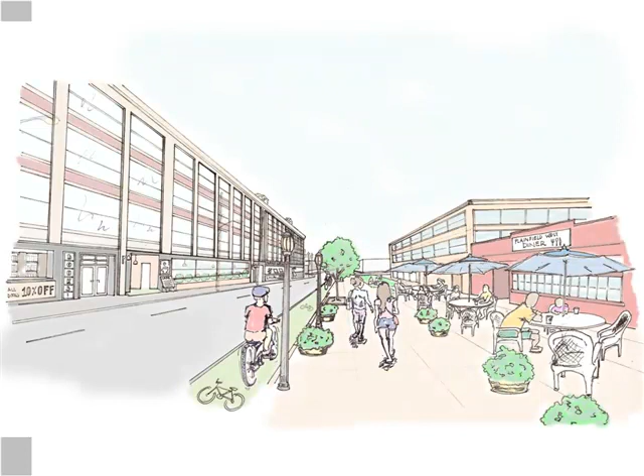The community charrette on March 27th provided us with an immense amount of feedback and information on Plainfield West that we have been able to use to further our visioning study. Our charrette focused on two key intersections that had been previously identified as potential future TODs, Grant Avenue and Clinton Avenue. During the charrette, citizens from the various neighborhoods in Western Plainfield gave us key insight, opinions, and commentary.

The existing land use map demonstrates the features of Plainfield West we took into consideration in our visioning process. The parks, especially Greenbrook, play an important role in this community.

Presently, Phase 1 drawings of the Greenbrook Trail have been completed and will soon be out to bid for construction. These paths connect to both Clinton and Grant Avenues. After identifying the other parks throughout the southern side of the tracks, we enhanced the bike loop in Plainfield West to include these additional green spaces.

Along with increasing bike paths and ridership in Plainfield West, there are many opportunities at the edges of Greenbrook Park to enhance usage of the park and engage the Plainfield West community.

In addition to the parks, other existing land use elements include established residences, community programs, industrial lots, vacant lots, and the two historical train station sites.

Our proposals take consideration of the susceptibility to change map, first highlighting sites most immediately susceptible to change in yellow. These sites include vacant lots and buildings that could be developed in the near future and are included in Phase 1 of our proposal. Sites with medium susceptibility to change are highlighted in lighter yellow and include sites currently in use but which we believe could ultimately better service Plainfield with different uses in the future. They are discussed in Phase 2 of our proposal and are considered more long-term changes.

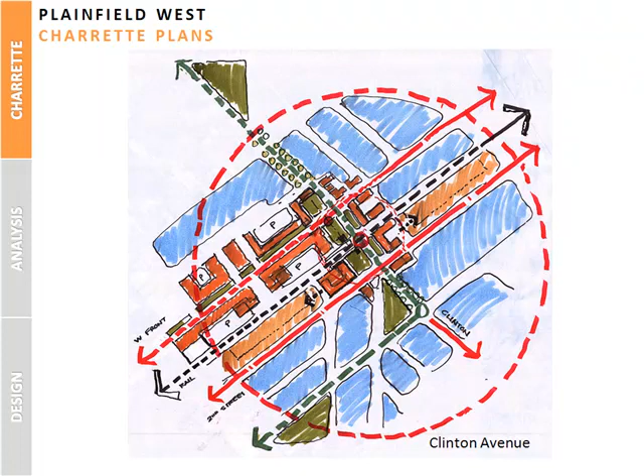Our drawings and discussions with the community at the charrette established Clinton Avenue as a primary TOD hub with the possibility of a future Plainfield West train station.

Current distances on the Raritan Valley line are among the primary considerations for Clinton Avenue as a TOD. In addition, Dunellen has a very limited parking capacity, which Clinton Avenue could capitalize on.

In conjunction with the TOD at Clinton Avenue, the charrette developed Grant Avenue as a community-based amenities and services hub, including retail and recreation. In our proposal, we continue to develop what was initiated at the charrette.

Recognizing the potential for a train station and yet the longer time frame this would take, in Phase 1 we have developed Clinton Avenue as an intermodal transit station, connecting to and accommodating pedestrian, bike, jitney, and existing bus routes. This intermodal hub would serve as a placeholder for train service in Plainfield West and begin to develop the density and services required to create a future station.

Recommended Phase 1 land uses surrounding Clinton Avenue include the intermodal station, surrounding mixed-use neighborhood commercial, and new residential. Land uses around the Grant Avenue community hub include recreation, city regional commercial, and new residential.

In addition, we identified infill lots on 2nd Street between Clinton and Grant Avenue, development of which would improve the street and pedestrian conditions, increase safety, and strengthen the adjacent established residences.

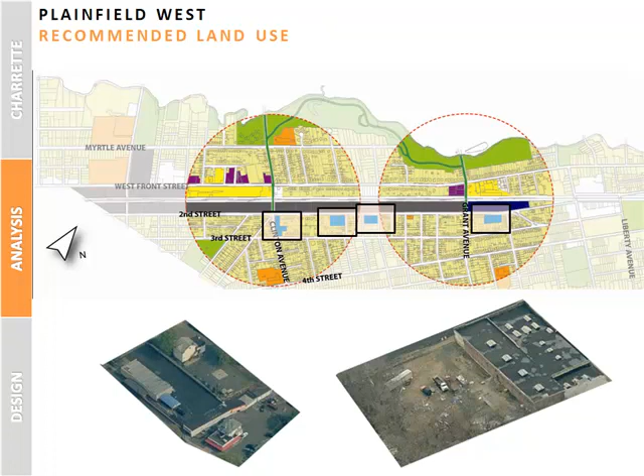While building typologies have been developed at both hubs, we will first focus on those on Clinton Avenue. The intermodal hub could incorporate a green open plaza surrounding the intersection at West Front Street and Clinton Avenue, surrounded by mixed-use 2/1 and 3/1 buildings.

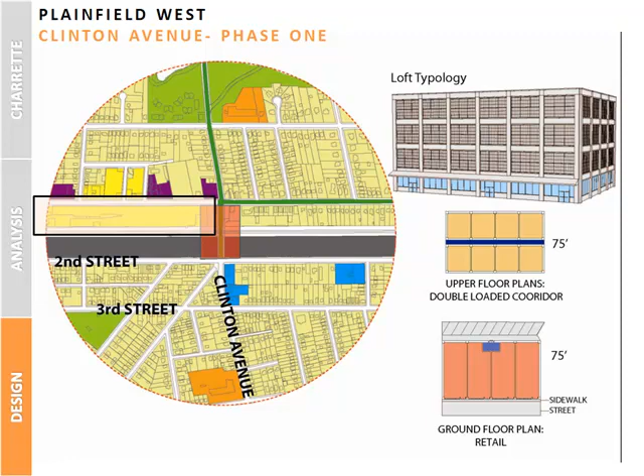The Mack Truck building becomes a 3/1 loft housing with retail at the bottom and parking in the back adjacent to the rail line. 2/1 units have been placed across the street from the Mack Truck building with parking in the back. 2-story residential units have been designated on Bradford Street, again with parking in the back that can be shared with the 2/1 units on West Front Street.

This section shows the transition from the industrial building at the rail line to the mixed use across the street and to the 2-story residential at Bradford Street, with the building height stepping down to accommodate the 1- and 2-story established residences on the other side of Bradford Street.

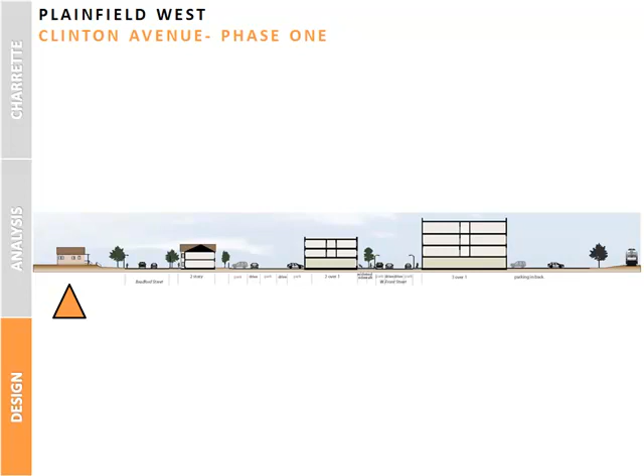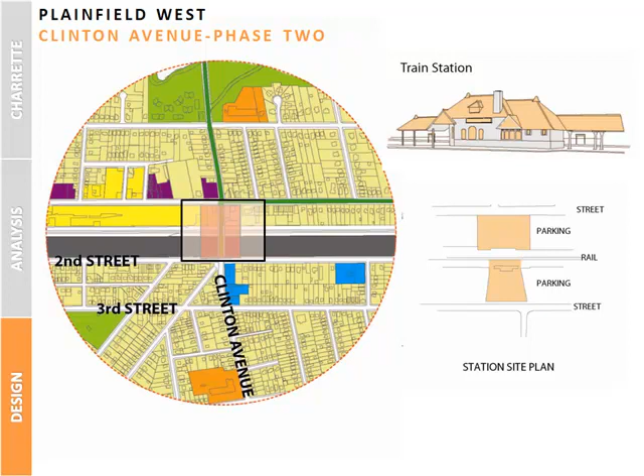In Phase 2 at Clinton Avenue, we consider the prospects of a train station and recognize that both sides of the track would then need to be utilized for the station building and shelters, parking, as well as drop-off and pickup zones. Additional new uses could include 3/1 or 2/1 typologies to further increase density around the station, as well as offices, which could support retail shops and restaurants during the day.

Complementing a TOD at Clinton Avenue, we consider Grant Avenue as a community services hub, located conveniently for Plainfield West citizens, as well as with efficient access to Route 22 to bring in additional consumers and visitors from outside Plainfield.

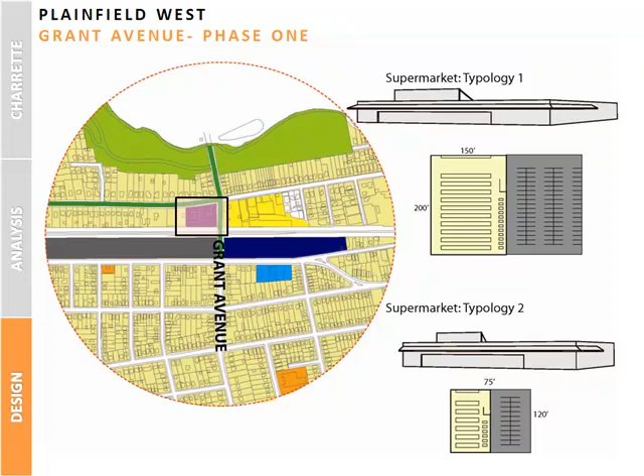This particular lot, located north of the tracks, is the appropriate size for a medium-sized supermarket with the necessary parking. Across the street from the supermarket, additional housing in varying forms can be implemented.

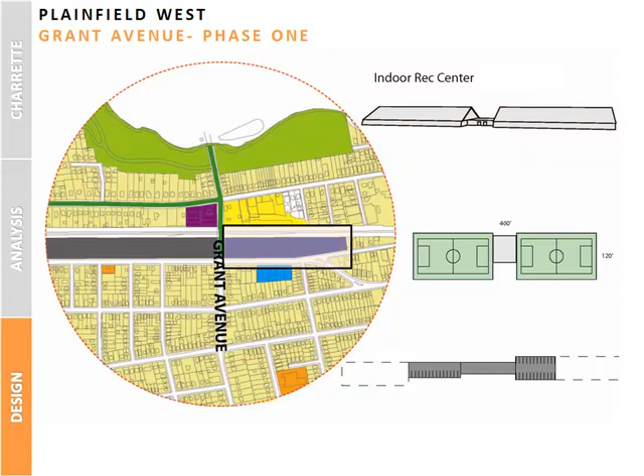While the old Grant Avenue station is also an appropriately sized site for a larger supermarket, it is also a highly viable location for an indoor sports complex that could become both a local and regional destination. Complementing this typology would be smaller retail stores and restaurants across 2nd Street, creating a dynamic environment of recreation and entertainment for families, teens, and adults.

The pairing of the sports complex and mom and pop, as well as chain stores across the street, could create a neighborhood bustling with activity well into the late evening hours.

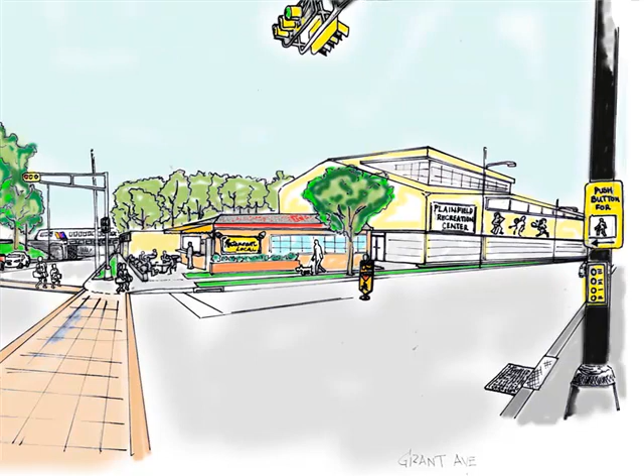Phase 2 at Grant Avenue likely sees the Iron Works as a continuing sustained business, which could be complemented by additional light industrial footprints or larger scale commercial and entertainment buildings.

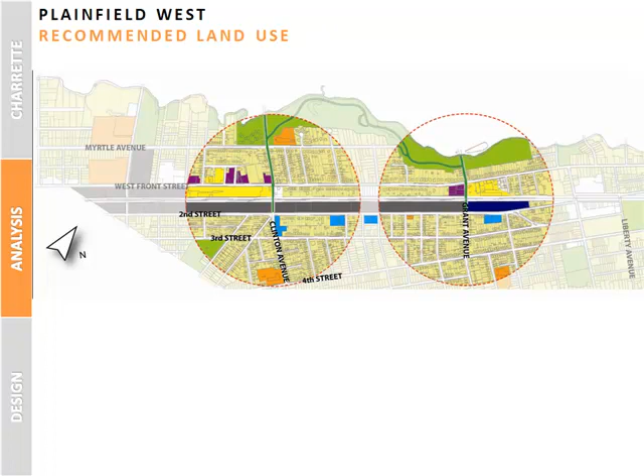Our proposal is meant to provide a comprehensive vision of the possibilities and their alternatives at Clinton and Grant Avenues in the efforts to improve the lives of the residents.

In conclusion, we hope that our vision and suggestions provide inspiration for citizens and demonstrate the immense opportunities to strengthen Plainfield West, develop a strong neighborhood economy, and create a lively, safe, and strong community environment.